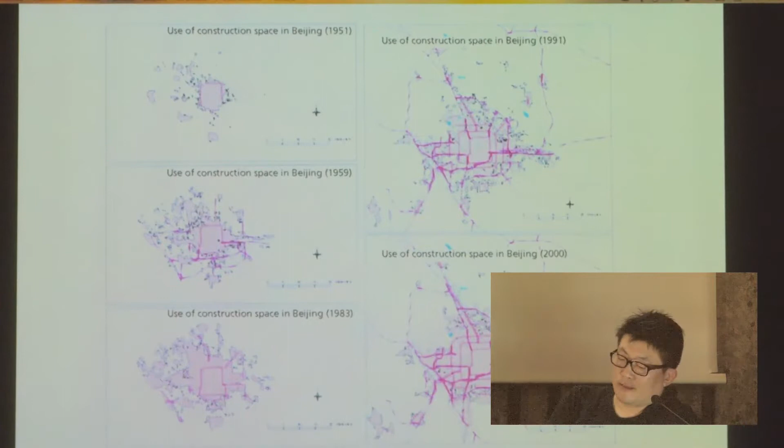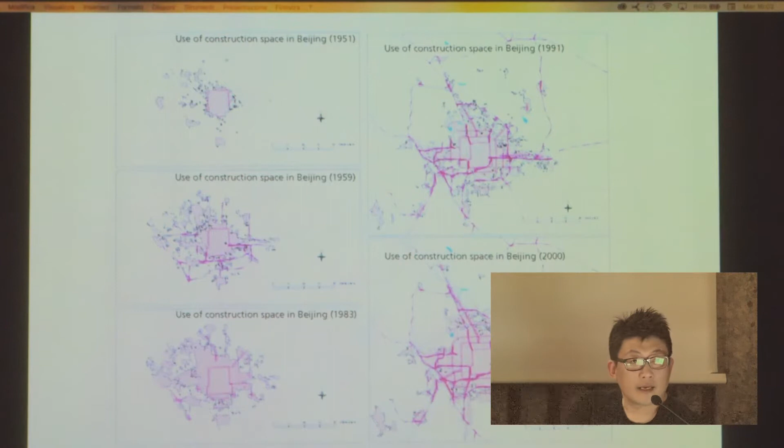So I'm a Beijing person. I was born in Beijing. This diagram shows you the expansion of Beijing. This is the city back in 1951. And this is the same scale. And by 2000, the city had already become this size. It's the same scale. So you can imagine how fast the city has been expanding. But this picture is even more interesting. This is the old map right after the liberation of China. So this is the capital of Beijing, the yellow part.

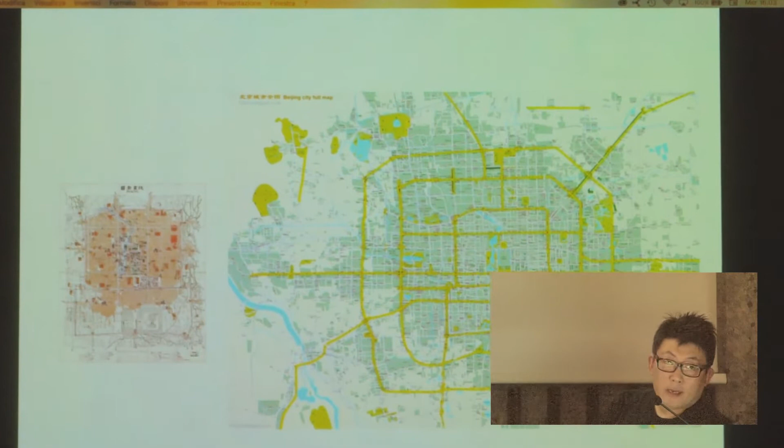And this is today's Beijing. And these are in the same scale. So, in the old Beijing, we have the famous city wall. It's this boundary here. But now the city wall has vanished because we demolished it. And we actually changed the city wall to what we call the second ring of Beijing, which is a very important expressway. But now we already have the 6th ring, and we're building the 7th ring. So just to give you a sense.

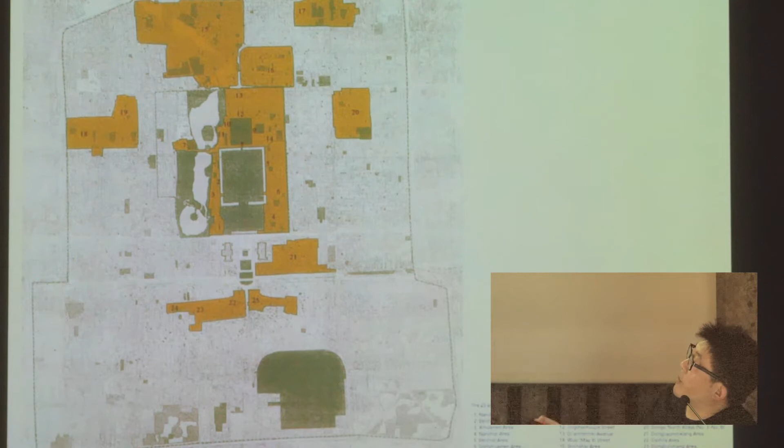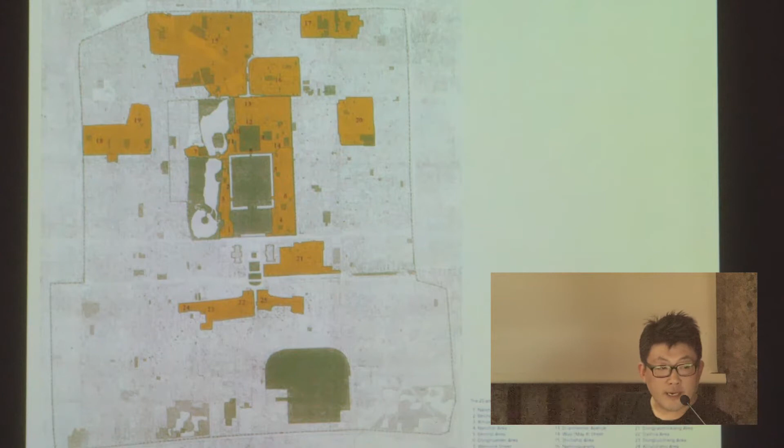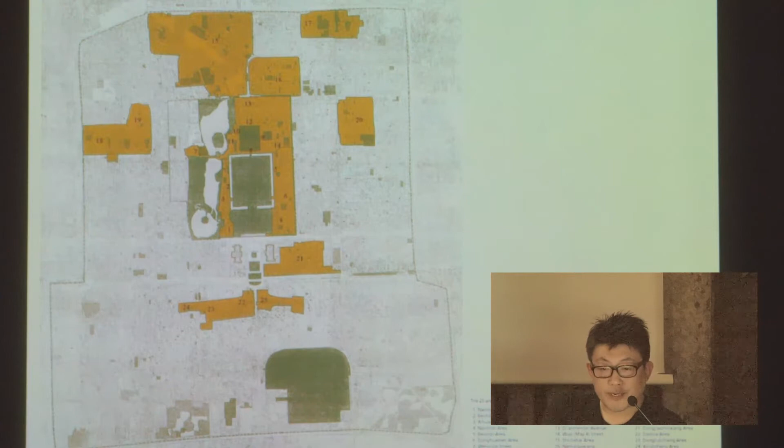And this diagram shows that this is the boundary of the city wall. Before, in the old time, inside the city wall was the continuous, complete urban texture made by temples, by the Forbidden City, and by the courtyard texture. It's a continuous, beautiful urban fabric. But now, only 25 pieces are preserved. All the rest of the area has already been modernized by this totally different characteristic of architecture and urban situation. So that's the picture I give you.

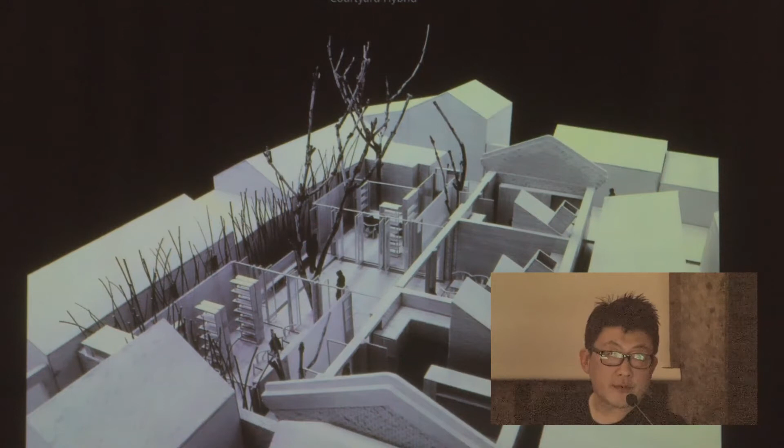I think in the recent 5 years, or even a little shorter time, for example, 3 years maybe, more and more people started realizing we have encountered a very serious issue. We sort of lose the character and the essence of the city we grew up in and are familiar with. So during such a transitional time, I think it's a great challenge for architects because we always have to make our own judgment based on each different project. We have to think enough about whether this is the right thing we do or not.

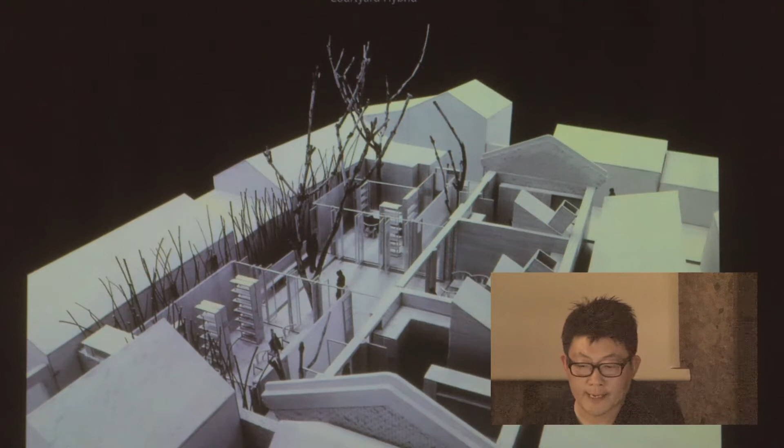So China is such a huge country. My personal feeling as an architect is that even though we are Chinese architects and we practice in China, if you go to a different city to design different architecture at different places, sometimes you face totally different culture, different climate, different people, different lifestyle. But that's part of the interesting thing of architecture, because you always have a specific condition unique enough to challenge you or to develop your own concept, engaging with the surrounding condition.

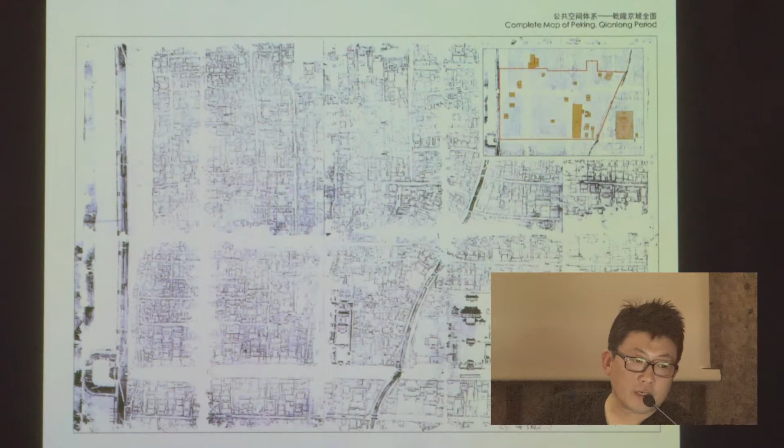And for me, that's almost like the dream place to live, because you have your rooms surrounding exterior space, so you have your own piece of sky, and you have your own piece of earth. And normally you will have trees and vegetation inside the courtyard. So it's really about artificial and nature. I think that's a very harmonious relationship between humankind and nature.

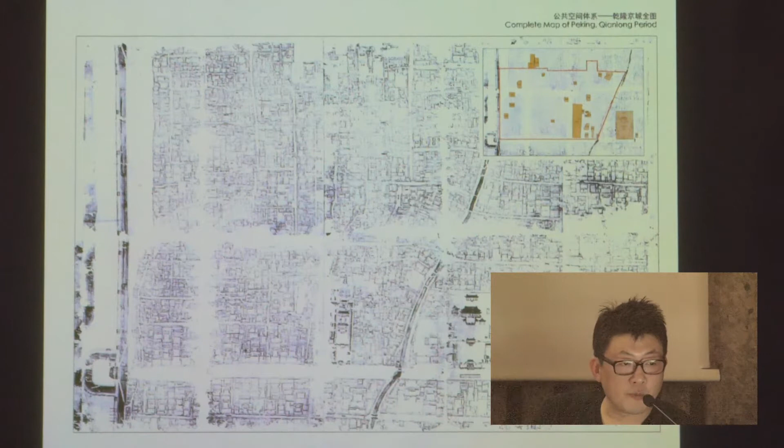But as I explained, right after the liberation, many people came into the city and the population started growing drastically. The light gray is a little bit unclear. Basically, the light gray is the original texture of the city, but these black blocks are actually the additional spaces inside the courtyard. We call this the cluster courtyard, because before, one courtyard was only for one family. So it was a perfect relationship between publicity and privacy.

But now we don't have that condition anymore, because most of the courtyards in this district have to be shared by 5 or 6 families. So it changed the living condition in a very bad way, actually. So this is a diagram showing the original texture of the courtyard district.

And you see the density has changed over the recent 20 or 30 years, with this additional space built inside the yards. It's actually the local residents who built such spaces by themselves, without any permission, because this is their daily living space. They don't need permission to build this kind of stuff.

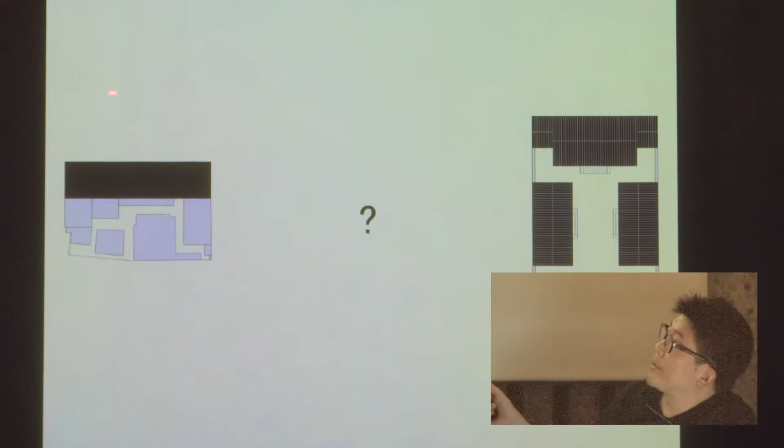So our design task: this is the original courtyard, but this is the cluster courtyard. We have to face this condition. The courtyard we're working with actually belongs to the government. It's a dormitory shared by 5 families.

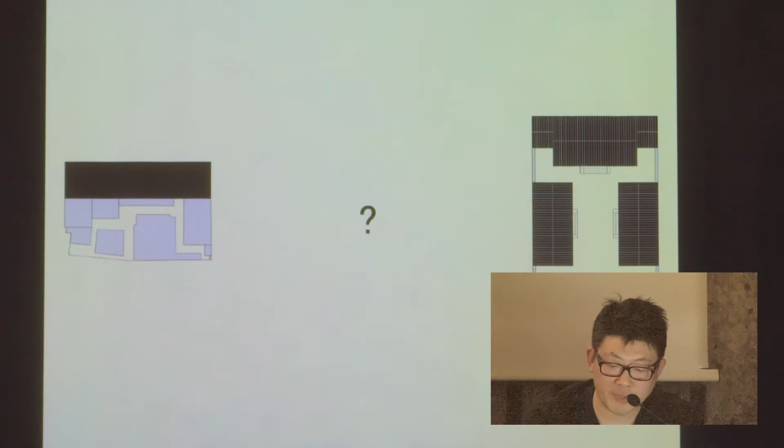The government was able to give them other places to live around this neighborhood, and they want to empty this courtyard and transform it into public space to energize the local neighborhood and create some public social life. So that's the design program.

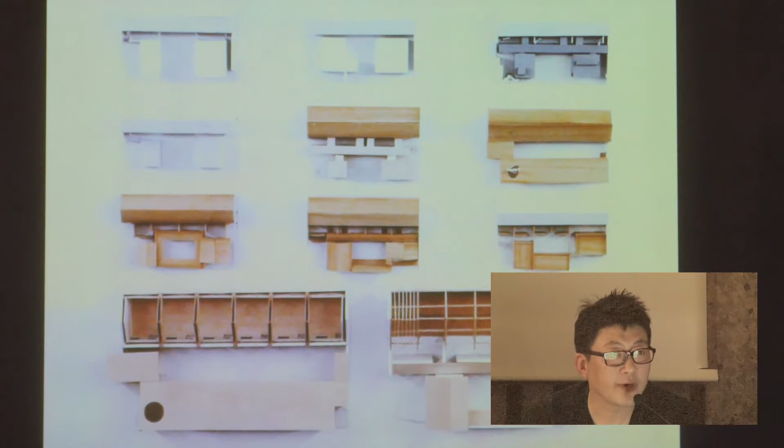In the very beginning, we went through a series of design comparisons, trying to find the appropriate design solution through all these sketches and models. And this is very close to the eventual layout. It's a very small courtyard, only 200 square meters including the yard and the interior space. But inside the courtyard there's a series of functions. That's why we call this a courtyard hybrid. It's a mix of functions.

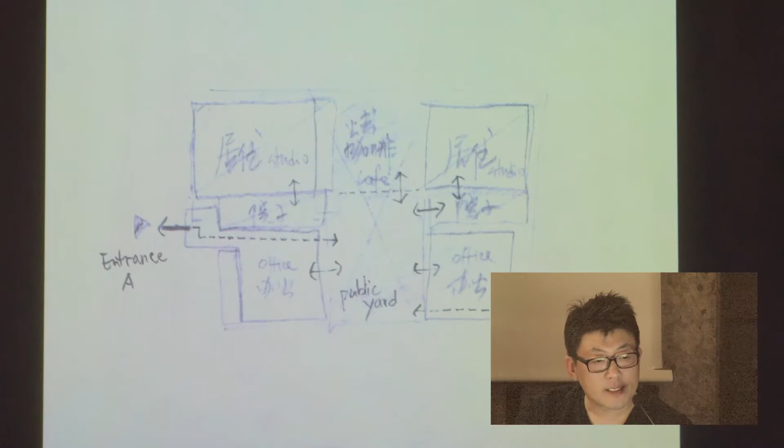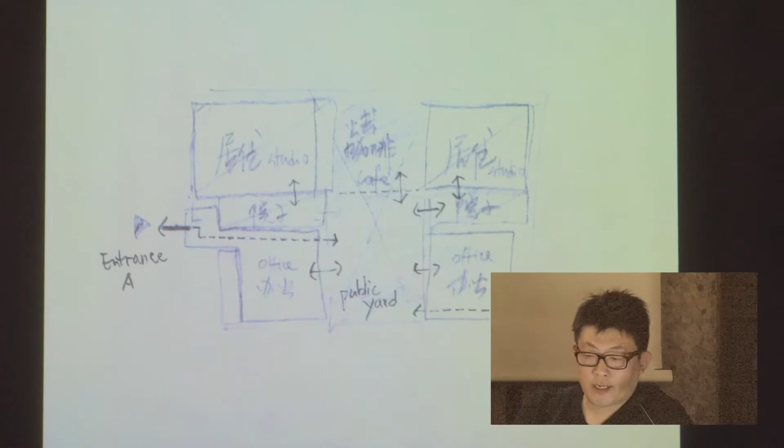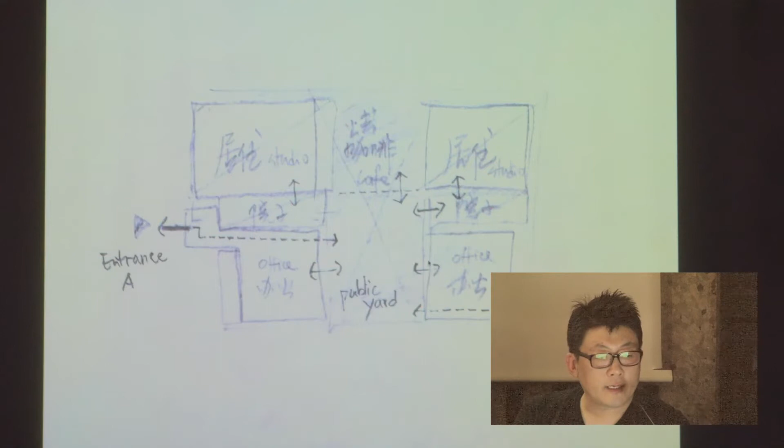We have to leave these two corners for future rental space, for workers and professionals working around the neighborhood. So it's the leasing space. But because we're trying to create public space for the neighborhood, we leave the central room for a public coffee and lunch. And this part is still exterior space as a central yard.

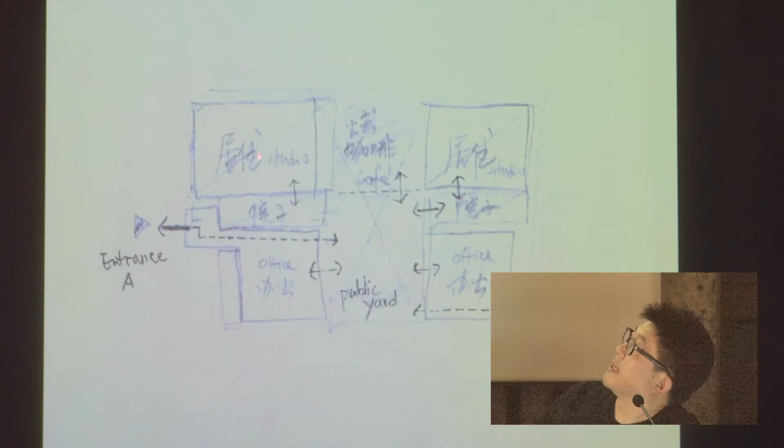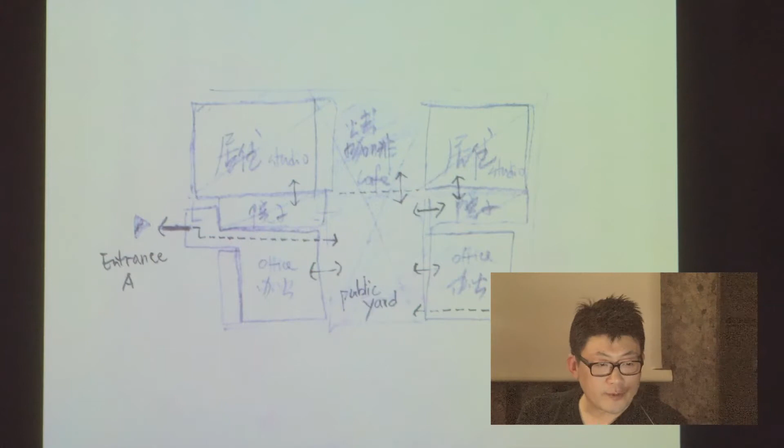To set up this privacy, we leave these two very small yards to separate the private space and the public space. And these two small rooms are multi-function rooms, which will be used for different purposes after construction. So that's basically the structure of the space. And this is a more detailed diagram.

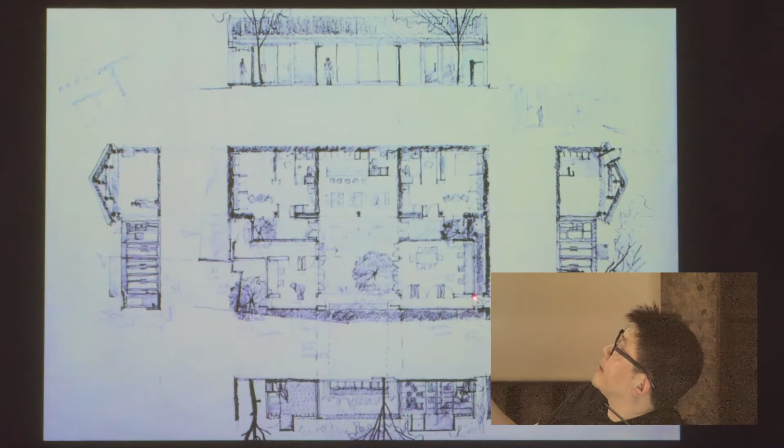You can see we have two small units for living, for rental, then two small multi-function rooms and the central cafe, and they share one big yard, with the two small private yards on the sides. But what's very interesting about this location is we have a Hutong, which is a very narrow public alley, on this side and on this side too. So we leave a passage between these two Hutongs, meaning this yard can connect the urban circulation of the public.

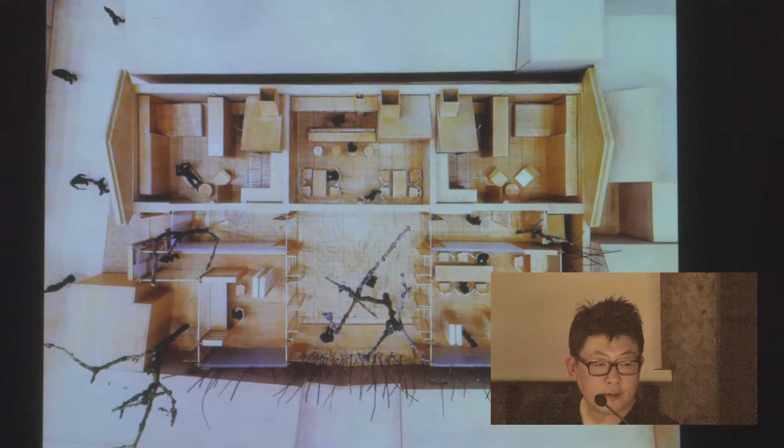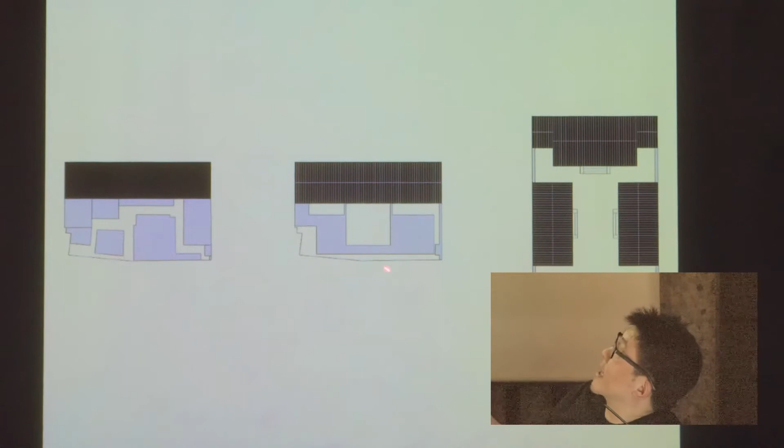Gradually we went into this larger scale model study for the space. Basically, between the traditional courtyard and the cluster courtyard, that's our layout. This is an axonometric showing you the space underneath and the structure system, which is basically two kinds of structure, because we have to rebuild this part complying with the local code, because that's the main building along this urban fabric. But for these two parts, we can use a relatively more contemporary structure type, which I will explain later.

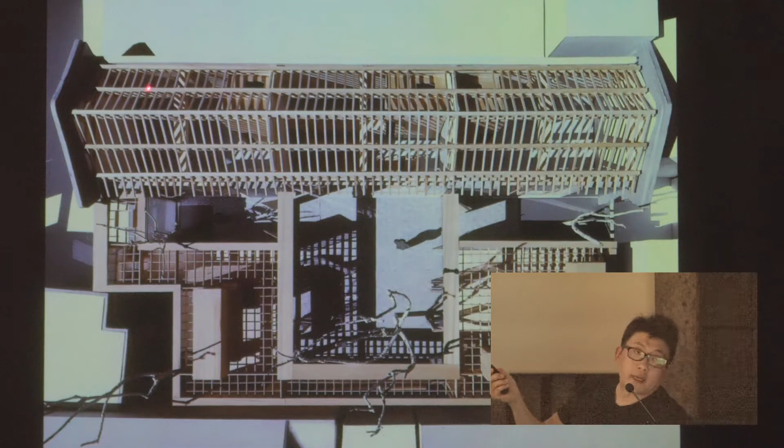So you can see that's the model showing you the two systems of the structure. This is the traditional gable roof timber structure system. And this is by a laminated bamboo, and it's like a waffle beam structure system. So it's like a juxtaposition of the two systems, representing the old and the new.

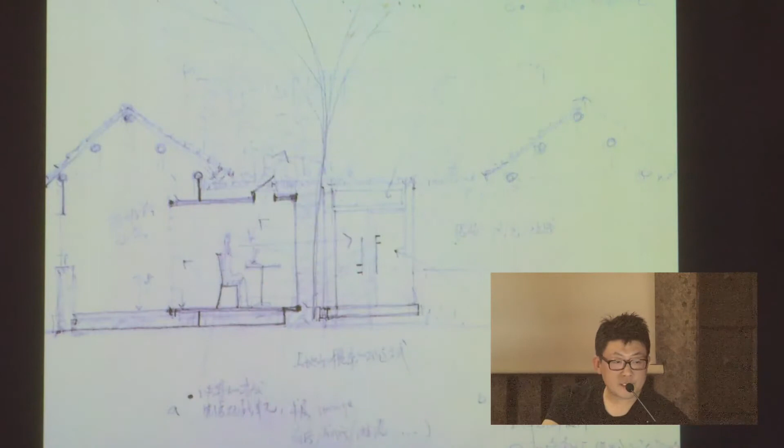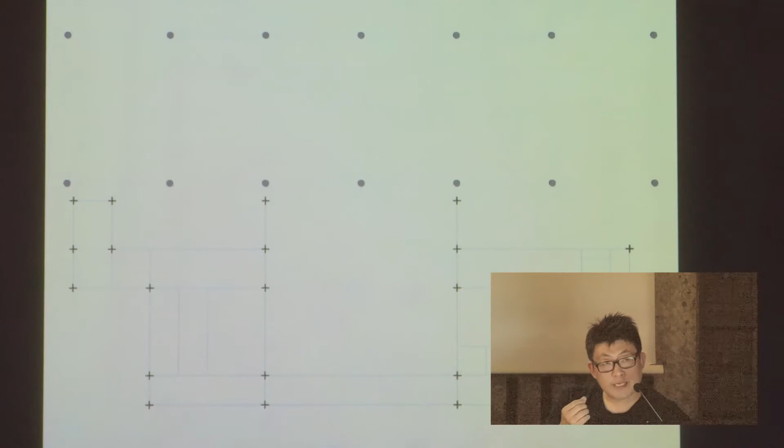Some sketches during the design process. So that's the two major structure systems. This is traditional, and that's actually designed by us, the architects. The reason we use this new system is because we have to try to build this building within a very limited time frame, and also we have to reduce disturbing the neighborhood.

So the new structure system, which is the laminated bamboo structure system, we can prefabricate it in the factory and then ship on site and assemble on site. So that will give us a lot of convenience to build this up. And the laminated bamboo is all plate. We use this copper bracket just to hold them together to be column and beams.

Well, it's a sad story. During the construction drawing process, one day the client called me and said, "Dong, we changed our mind. We want to eliminate the two living units in both corners because we think it's very hard to operate later on." Because they're the government people, they don't have the professional resources to help them

manage those. So they said, why not we just leave this space empty as a public exhibition space, and we can collaborate with Beijing Design Week or something like that to have different kinds of public events take place here. Well, it's a sacrifice, but I think it's okay. So that's a big change.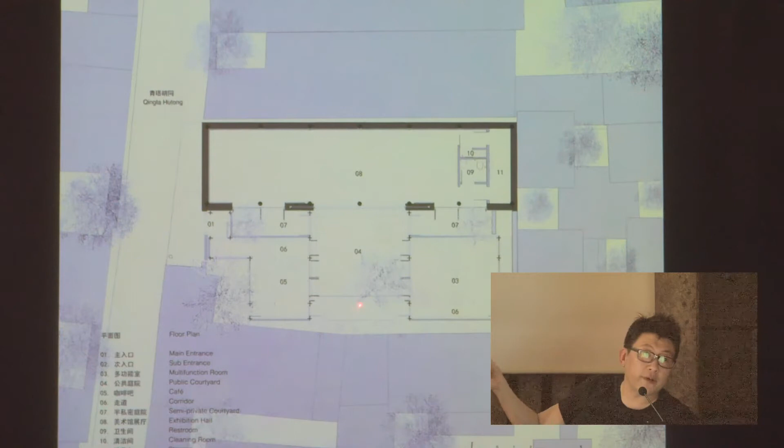From the quality of the space, I think it loses a kind of relationship between the small yards and the living units behind. But we just have to accept. But that's not the end of the story, which I will explain to you later on. So after almost 8 or 9 months of construction, this whole building is completed.

So this is the traditional gable roof structure, the tile roof. That's the old part of the courtyard. And that's our new intervention by this laminated bamboo structure system. And this is the center space of the entire courtyard. Just show you some pictures after the completion.

Because the space is very small, we think this entire building is a big furniture. Many components of the building are operable. They could be open or rotate to meet the different requirements of the use by the people. So this is some elements and the condition of the courtyard. See, the shelf is rotatable to manipulate the layout of the space. This is a small pantry. It's also a rotatable furniture.

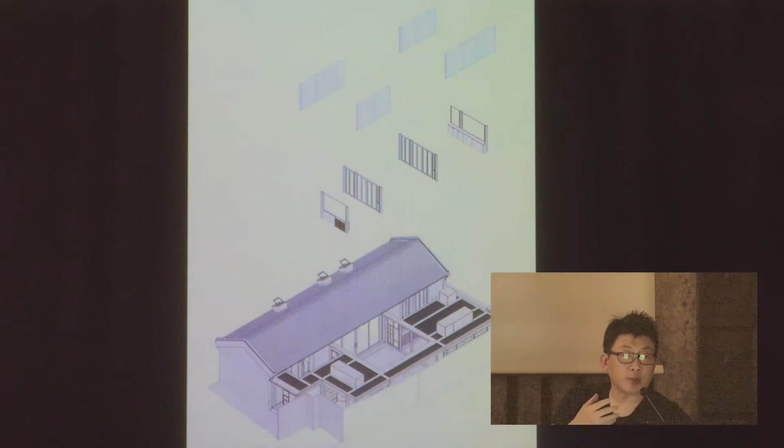And to create a kind of privacy, we actually use the material of glass block, which is a translucent material, to separate some individual space and public space. So this component here is made by this glass block system. It's customized, actually. We work with a local, very small factory to customize this material. And this is the twilight condition.

So in one of the directions, the space is very transparent. You see layers of space evolving in front of you. But in a particular direction, the glass block is translucent to create a certain privacy of the space. Yeah, that's basically the overall urban texture with our design in the middle.

So after the completion of the yard, the client called me again and said, we are very sorry, Dong, because we rent this entire yard out. So it's no longer a public space. We signed a 5-year lease with a private agency, which is a children's educational agency. So in the very beginning, this whole space was supposed to be designed as a public space for the neighborhood. But as a result, it's becoming a private, very expensive rental space.

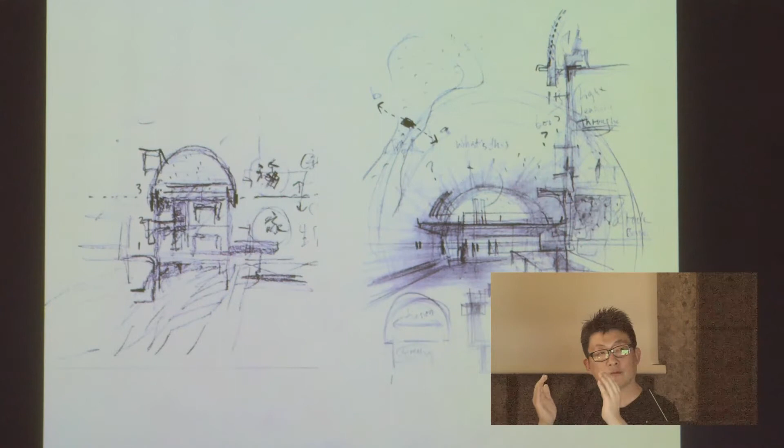also, this barrel vault itself is a type of structure. So it will come up with this load-bearing wall below and then converge naturally on the top. So you don't need to add columns and beams to support this. This is already a structure.

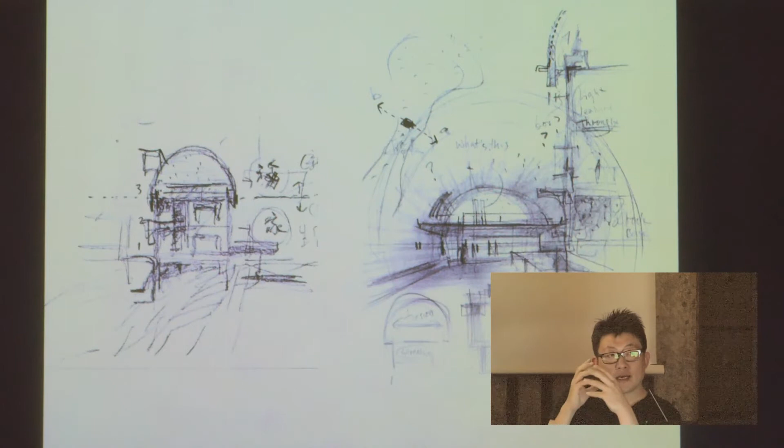And additionally, this entire family is religious people. They believe in Christianity. So this shape or this type of space has a very subtle indication of the church. So for them, in my mind, it could be like a family chapel. So there's a series of reasons why we selected this type of space.

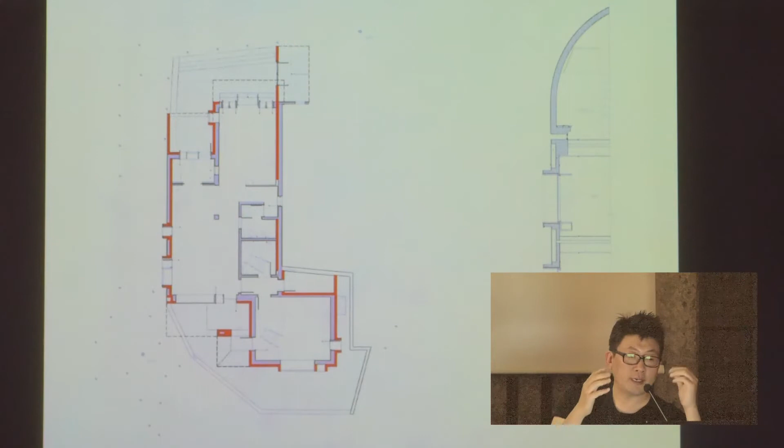And the solution of the structure: because of the current structure problem, and also we have to add the new floor on the top, the structure is a very critical issue in this design process. Eventually, we worked with the structural engineer and made the decision that the red lines are the new layer of 12 centimeter concrete attached to the original masonry brick wall to reinforce the existing structure system and also to support the floor at the top, which is over here.

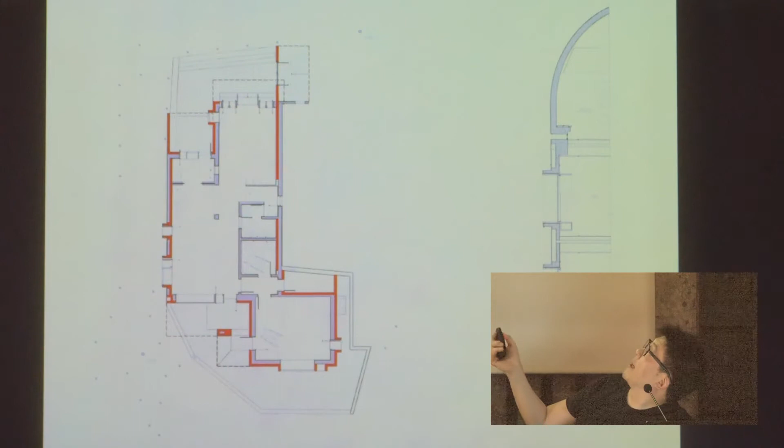And we actually leave a very narrow gap between this existing two-story structure and the new floor, which is the third floor, to indicate a relationship of new and old. That's basically the structure solution. But because of the new intervention of the structure, we have a little freedom to relocate some of the existing rooms.

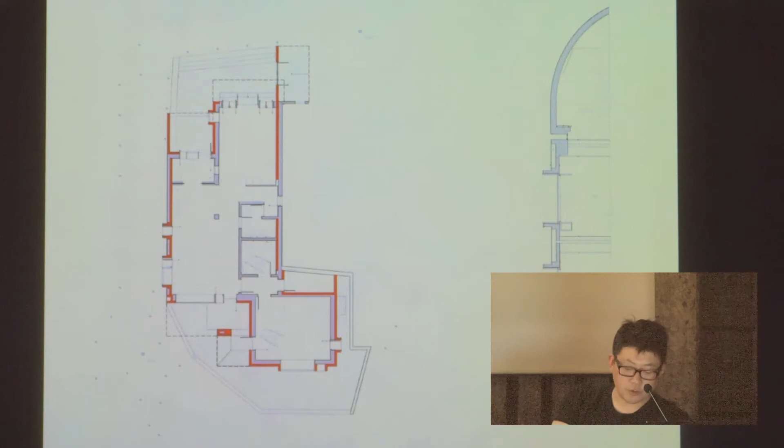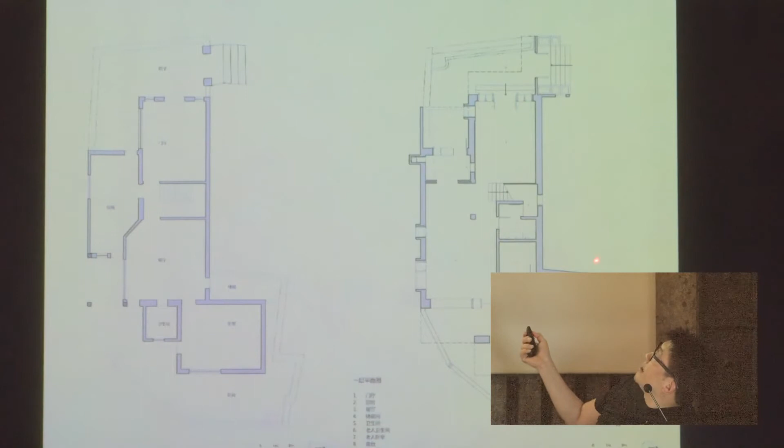See, this is their original floor plan of the first floor. That's the ocean direction. And they have the toilet right in the middle to block the view and the air and the light. So in the new design, because of the new structure, we can relocate this supplementary program to the back wall of the house, shared with the neighbors. That's the footprint of the neighbor's house. So we open up the major direction to the ocean to introduce more light, air, and also the view.

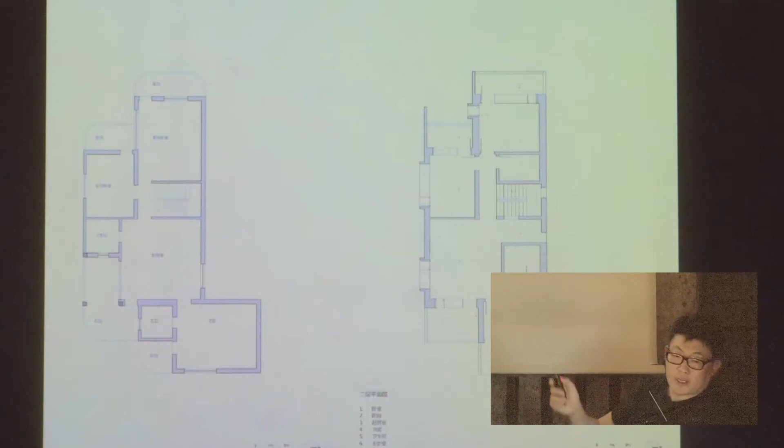A little bit similar on the second floor. Before, there were 2 bathrooms, and we relocated the bathroom along this wall to open up the major facade to nature. And the third floor for them is basically multifunctional. Right now they're doing karaoke in this space, and also they have a running machine here. So it's a family gym.

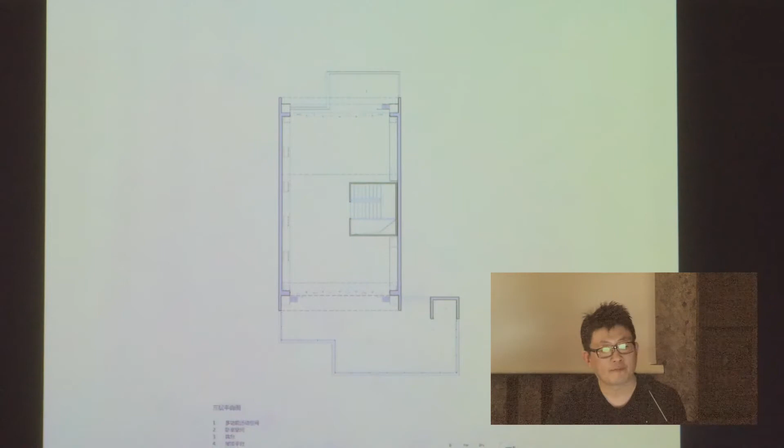They're not poor people, by the way, because of the captain and also the fishing industry, very good profit. So they're sort of rich people, but they're still villagers.

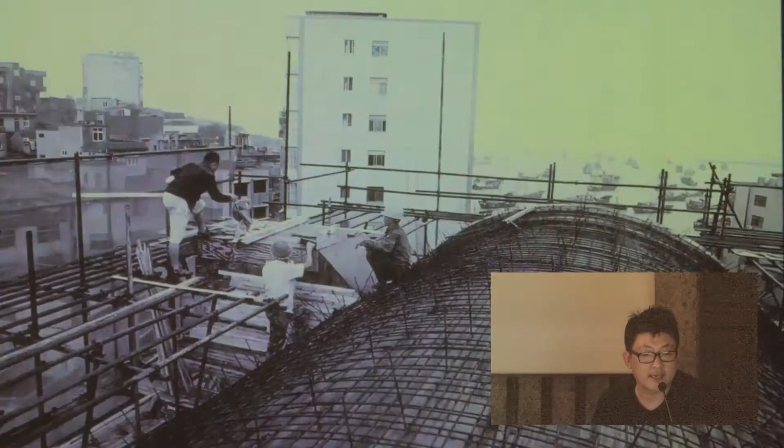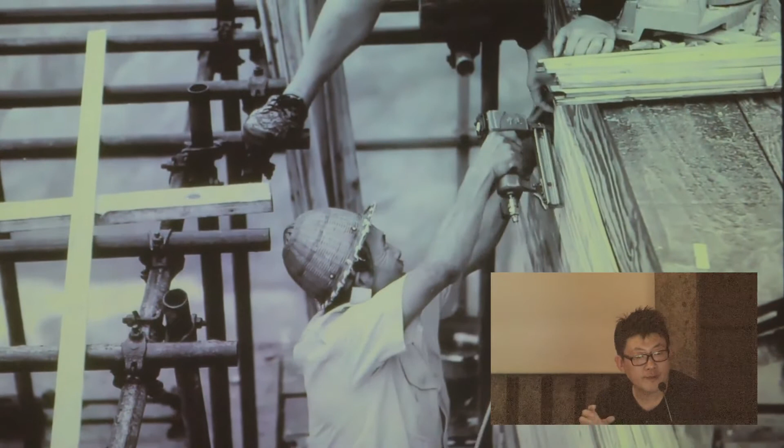Yeah. This is also another challenge to be an architect practicing in China, because sometimes you will encounter this very primitive construction technique. This building, first of all, is in the village, and because of the very narrow alley around the house, no big machine can approach the site. So everything is literally by hand. It's a handmade architecture.

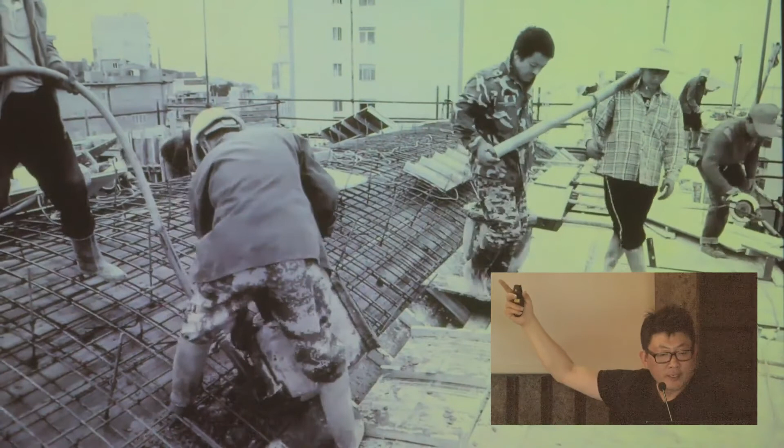And you can see this is the truck that transports the cement, and they have to stop about 50 meters away from the building. Then the concrete is carried by human shoulder to the house to cast the concrete on site. They're female workers. And they use the gear, and it's just barrel by barrel. The cement is carried up to the roof and then cast by hand.

In Beijing or Shanghai, in these big cities, the construction technology is already very developed. But in some remote areas, we still have to work with these very primitive conditions, which I think is very interesting. It's not a bad thing. It's a very unique thing.

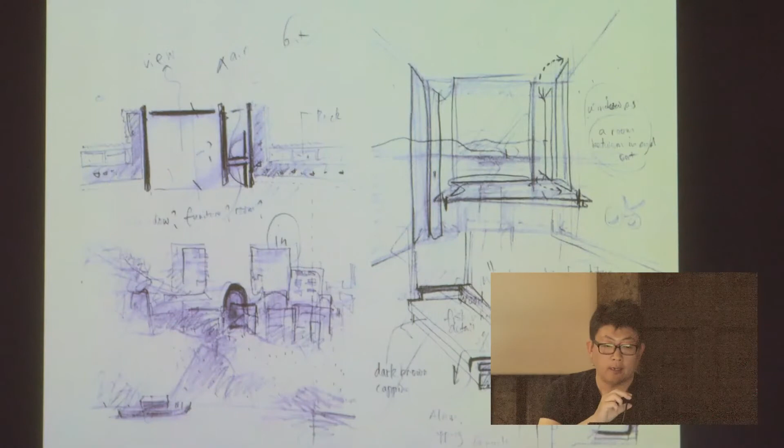There's another very important detail in this design project, which is the way we treat the window. Because we add a layer of structure attached to the original wall, we have a certain thickness, a depth of the wall, so we can play with it. We interpret each window not only as a cut opening in the middle of the wall, but as an insertion of a small space. So some windows are a table, some are a couch, for example, or some are a desk.

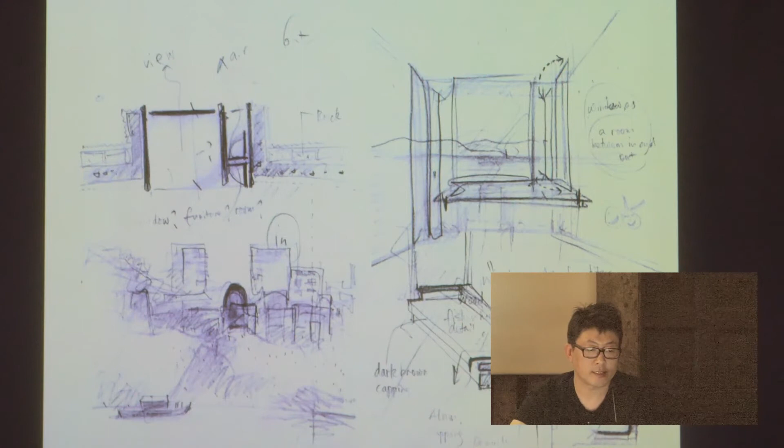So these are some sketches in the design process showing you the iconic details. For example, that's the living room, so the window becomes a couch. And we have this operable pane inside the window system. Each operable pane is always opaque, made of wood panel. We try to pull this operable pane into the space so it's convenient for your arm to control.

But we push the transparent glass pane to the very outside of the window system to maximize your view to nature. So that's the detailed design for the window system. That's when the operable pane is open. And that's the table for the daughter's bedroom. It's actually an insertion into the wall.

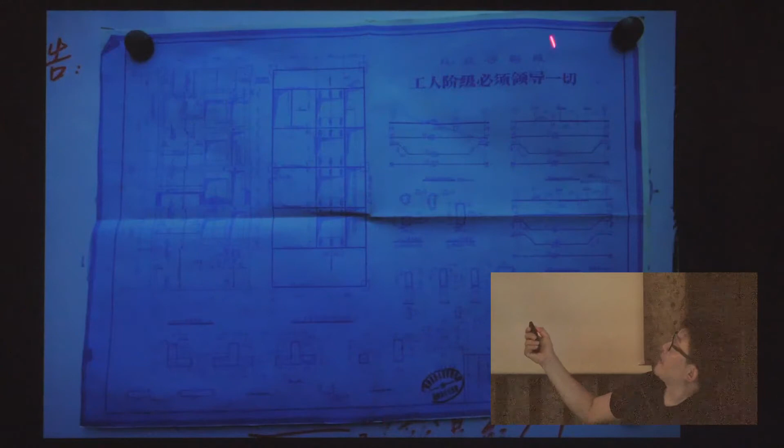That's a very interesting ideological period of time in China. And that's another construction drawing that said, we have to follow the great leader Chairman Mao to go forward. But that's the technical drawing.

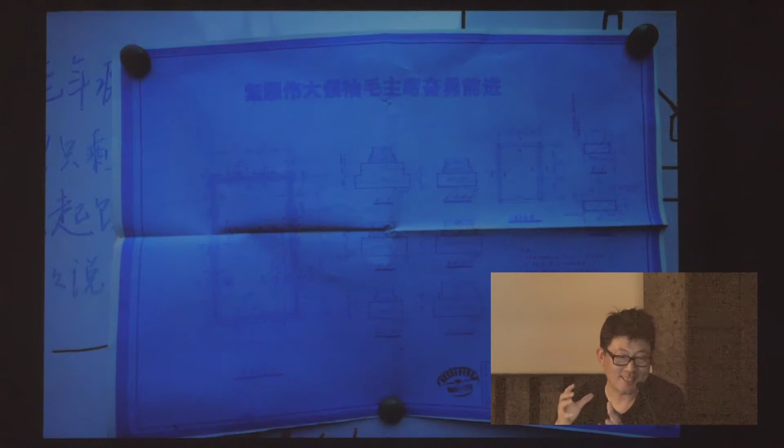And I had this chance to have a lunch together with some of the people who worked in this factory in their younger time. And I feel the emotion when we talk about the stories of their work there. And one of these guys even cried when he remembered his younger time. Because 30 years ago in China, if your family had a member able to work in this kind of governmental institution, it was an honor.

But you can imagine in the recent 20 or 30 years, China has transformed into a more commercial system. So they feel lost to a certain extent. But for me, this is a very important lunch because I feel this connection and the emotional attachment between these local people and that physical abandoned structure. So it's a very interesting connection actually for us to start the design process.

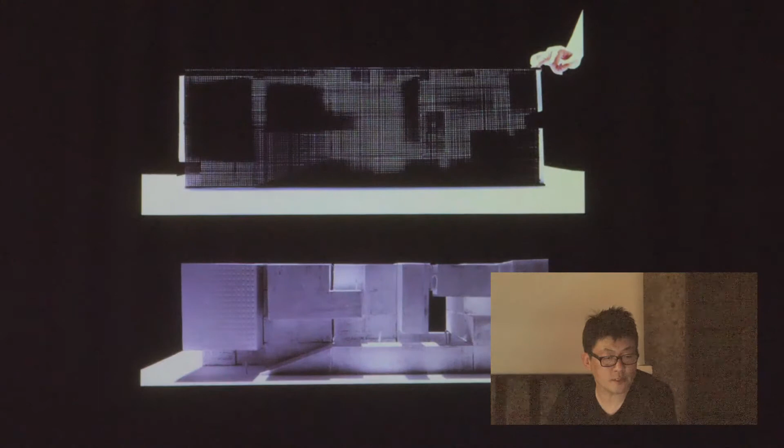Some design study in progress models. And gradually some ideas about the space started coming up. So we actually try to build a continuous pathway inside the new volume to give people the possibility to perceive the surrounding landscape at different heights. So the path is like a climbing-up pathway inside the new volume of the architecture. Some sketches during the process, some model study.

And along the passage, we set up 3 public terraces, somehow inspired by the local geographical features, this cave-like space. Because of the characteristic of the mountain, the rock is very soft. We call this a karst mountain. It's a term of geography. And when people try to cross the mountain from one side to another, normally they carve out this very narrow passage inside the mountain. So this gives us some inspiration when we design the new system of the pathway along the new building.

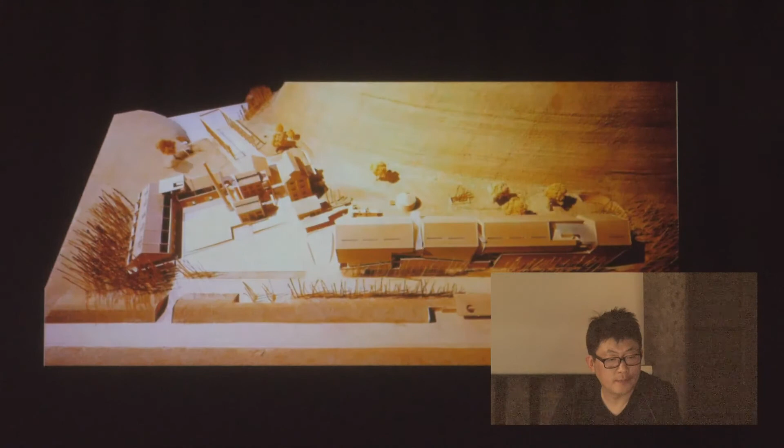And the good thing about this carving out is that we can still keep the form as simple as possible, because everything is inside. Meaning that the simple geometry will work better together with the old structure of the factory. So that's basically a diagram showing a continuous pathway connecting 3 terraces along the way. That's a more detailed schematic model.

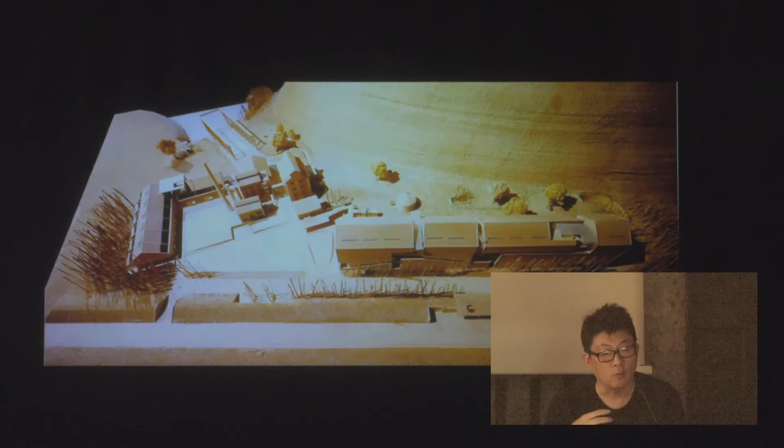So basically, the old structure is here, and that's the Lijiang River. This is a central reflecting pond. This is the new volume of the typical rooms, and that's the villa part. So that's the whole site plan of the context. And this is the main entrance, the gate of the hotel. So the new volume is actually acting like a wall to block this garden from the outside driveway.

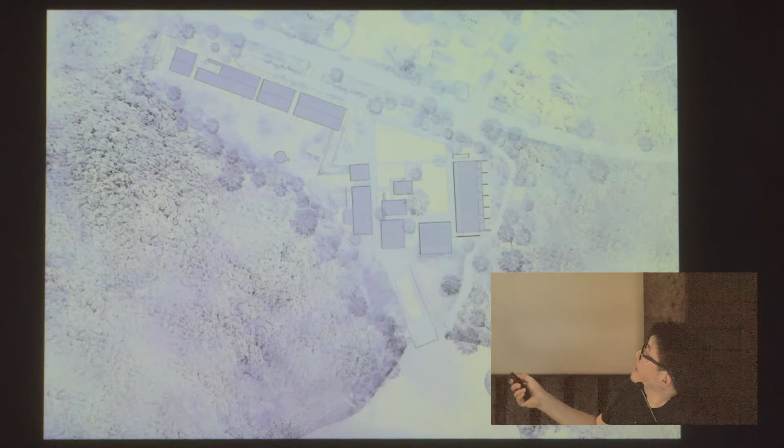That's another angle of the model. The master plan. So that's the new volume on this side, and this is the villa part. This is the new volume too. And that's the cluster of the old factory. That's the Lijiang River. And this is the truss from the old time to carry sugar cane from the river transportation, the boats, to the factory. So this is the original truss, but we transformed this place into a swimming pool. And the old factory right now is the restaurant, library, coffee, bars, this kind of supplementary program for the hotel.

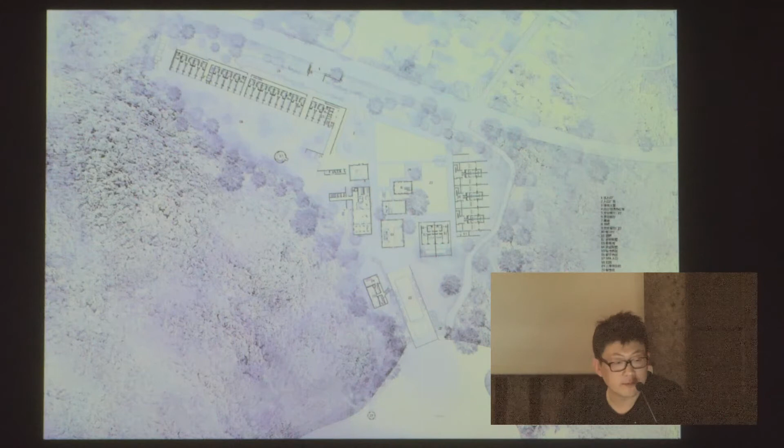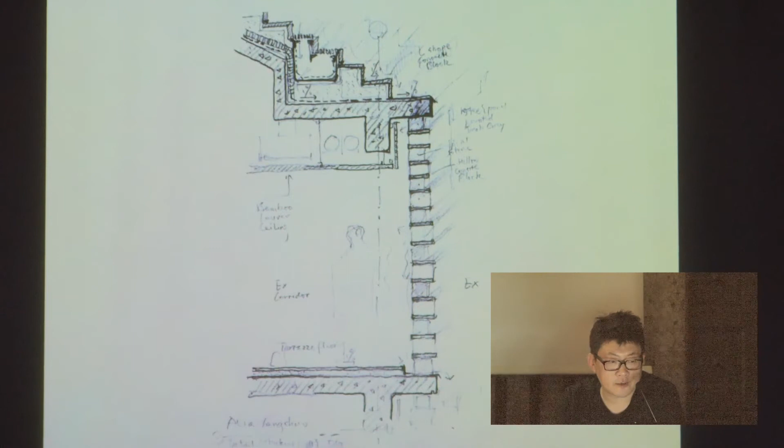And then later on, we went into the manufacture process, and the client worked with us very closely, trying to find the right manufacturer of the material. We have been searching for almost half a year around the nation, but eventually we gave up because the price is too high because of this kind of customization. And the solution was the client opened up their own factory alongside the site. It's a very small factory, so everything is possible in China.

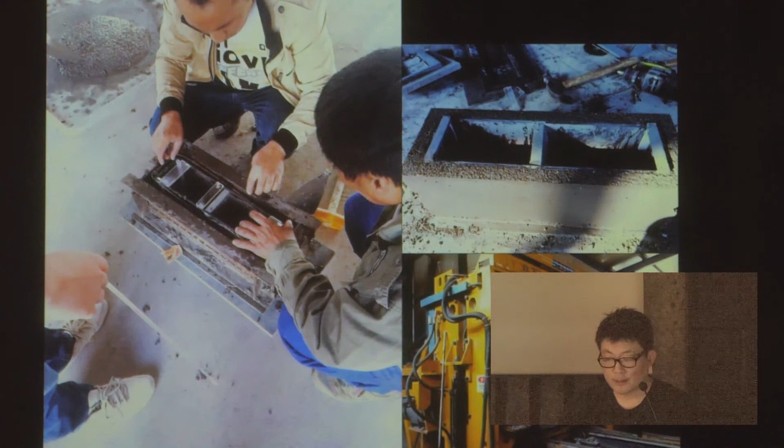So that's actually in the client's factory. It's a small workshop. We do some research about the different percentage of the aggregates, and also they invented this machine because basically they have to build the mold first, then they cast the cement inside the mold, and then they have to push the block out. And that's actually very tricky because of the shape, the geometry of the block. So they invented this very rough machine. I have some pictures later. I'll show you some detail.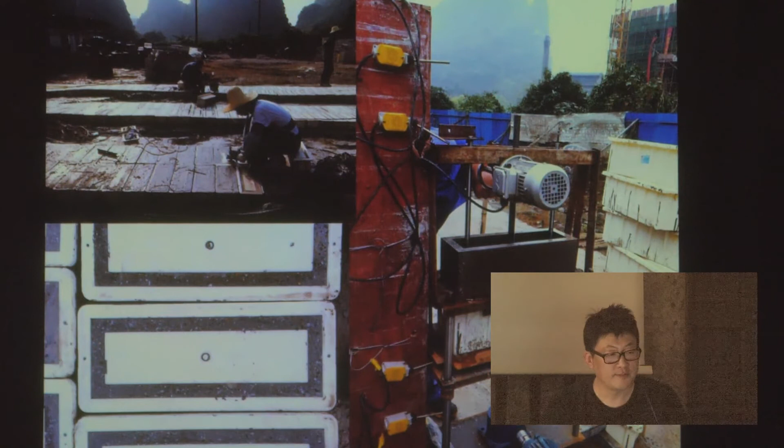And that's the mold, the plastic mold here. And they start putting the cement inside the mold. And this is when they put the steel rod to give sort of a tension for the concrete block. And here is a half circle wood stick. I will explain what the function of that is. And that's the machine to pull out this concrete block when it dries up. See, that's the wood stick.

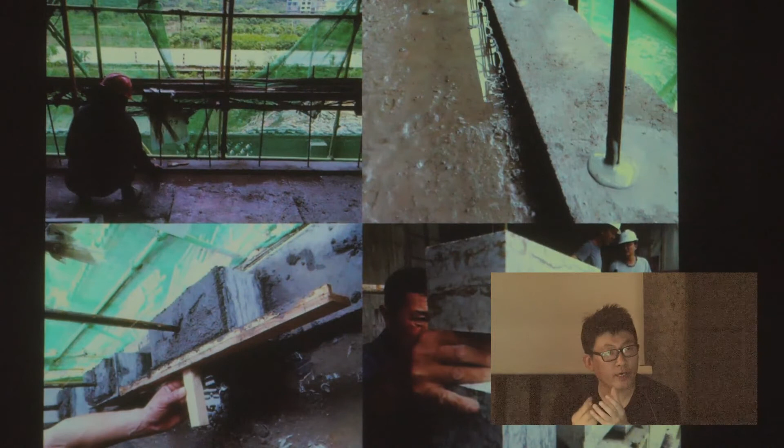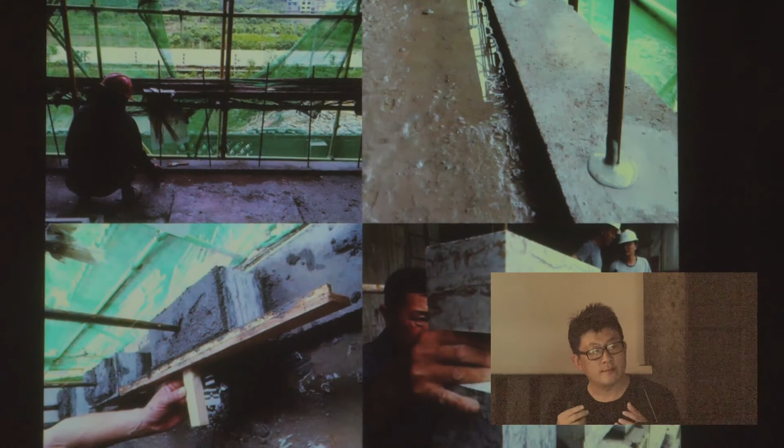And then there's the process of stacking. To resist the lateral force, but we don't want to have exposed reinforced concrete columns along the wall, so we have to put the rebars inside the wall. But we don't want to expose the rebars. So the rebars basically will go through the wall piece by piece. So actually every piece of block will have rebars to reinforce them to resist the lateral force of the entire wall.

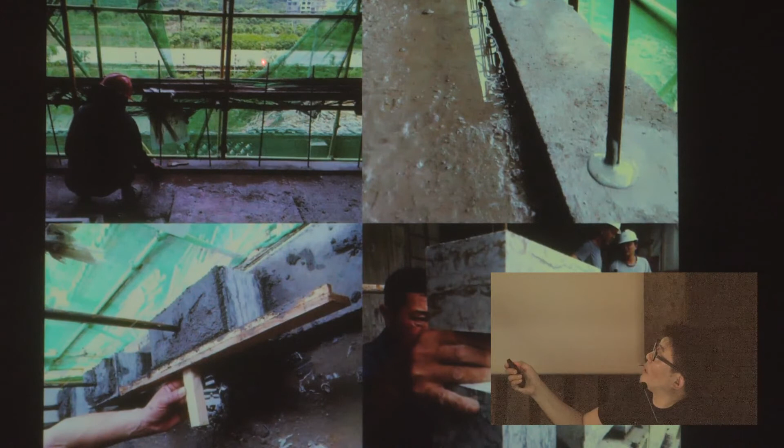Because of the stacking process, they have to stack one piece of concrete block, another piece of stone block. So basically it's by human hand. So when they weld the rebar, technically the rebar has to be connected to the floor above as an entire piece. But because of the stacking process, they do it piece by piece. So they weld the rebar first, and then start stacking the blocks. And then they weld another piece of rebar on top of it. Eventually, the rebar will connect to the top floor. So basically, the rebar is connected to the top and the bottom floor slab, to the main structure, to help resist the lateral load.

See, for the stone block, basically we drill a hole in the middle to allow the rebar to go through. But for the concrete block, this is a half circle. Remember that wood stick. Because of the wood stick, on each side of the block we'll have this half circle empty space. So together with another piece of block, the circle will allow the rebar to go through. So eventually the rebar is hidden inside the wall.

But the problem is how we finish the very top piece, because the rebar will go all the way up and has to be connected to the floor slab above. So the very top piece is a very tricky issue. And we actually spent a week; we didn't really think about this before the construction had the problem. And then we had to work together with the laborers to find the solution. And later on, it's the laborers who solved the issue. First of all, they leave an empty space between the rebar and the top slab. They put an additional piece of rock like this.

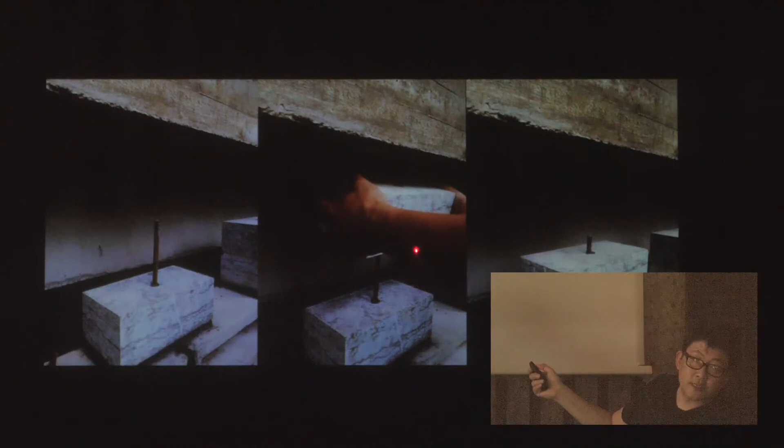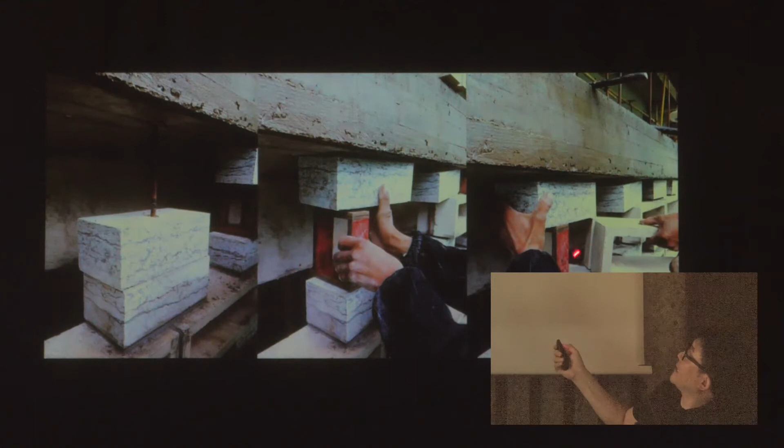And then they weld the rebar to the top of the slab. And they push up this piece of stone and slide the concrete block. So they eventually finish this entire piece of this facade. So it will be like this eventually. So it's kind of tricky. I will show you a movie about the construction process.

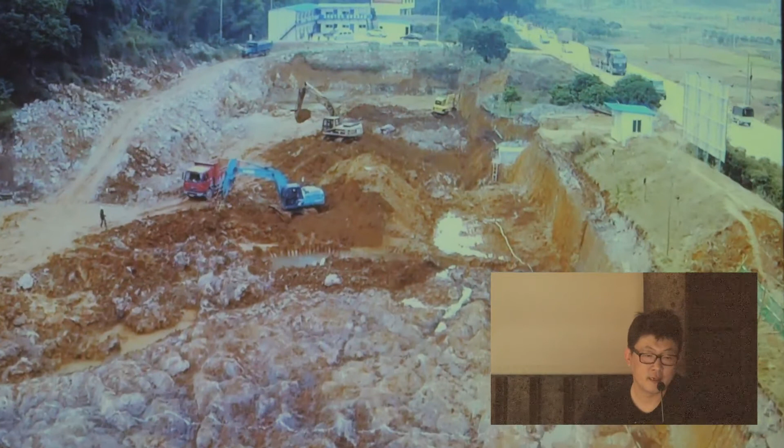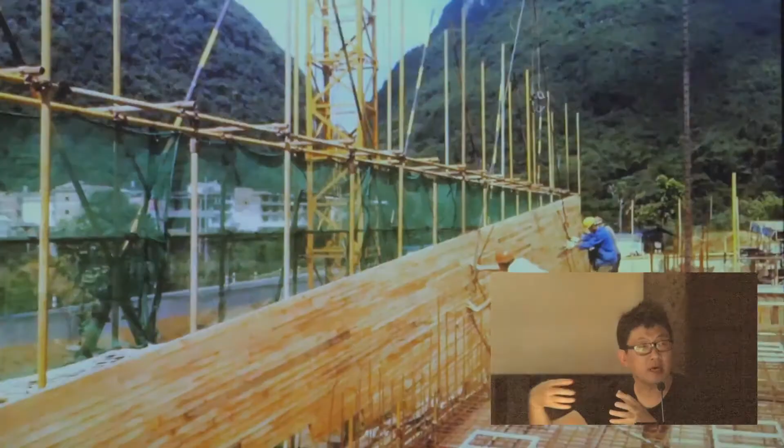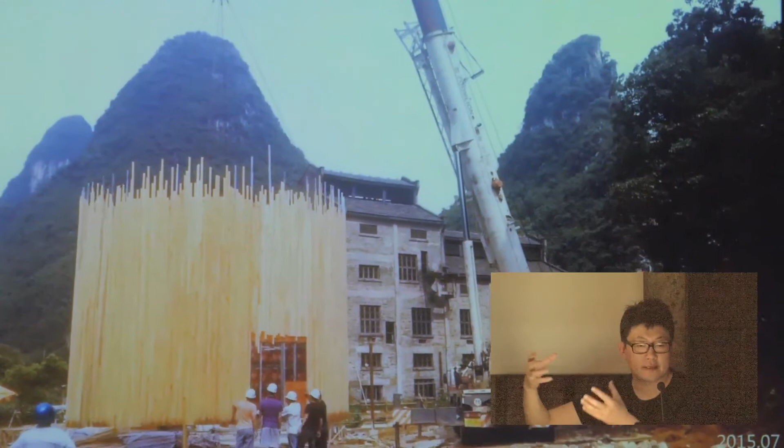And casting the concrete for the slab and the beams. We're trying to reduce the construction joints on the surface of the concrete. So we try to maximize the formwork. This is the big formwork installed to the right projection of the building. So sometimes it's the whole piece of one space. And that's the formwork. That's how they push out the concrete block.

That's where we test the strength of the block. We do have a structural engineer, but we're trying to make sure. That's the topping of the structural system. And that's the site. That's the landscape. That's the stacking process.

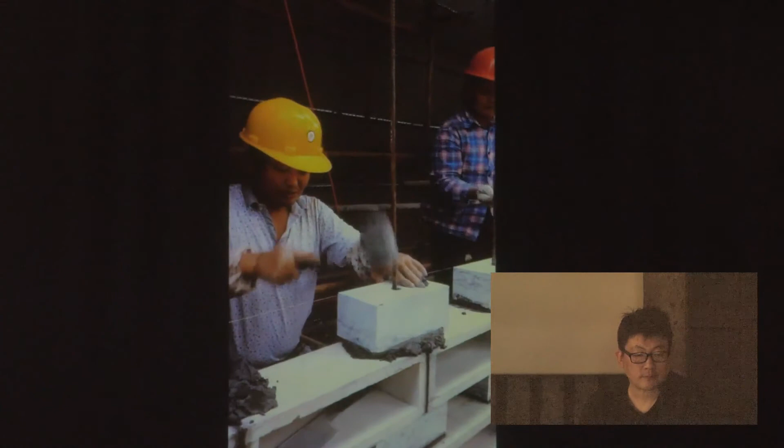That's myself and the interior designer. And we have a fence around the compound. So this is basically from the local stone wall technique. On the other side of the fence is a slope of grass. That's the waterproofing of the basement. This is when they made some mistake, they had to knock it off.

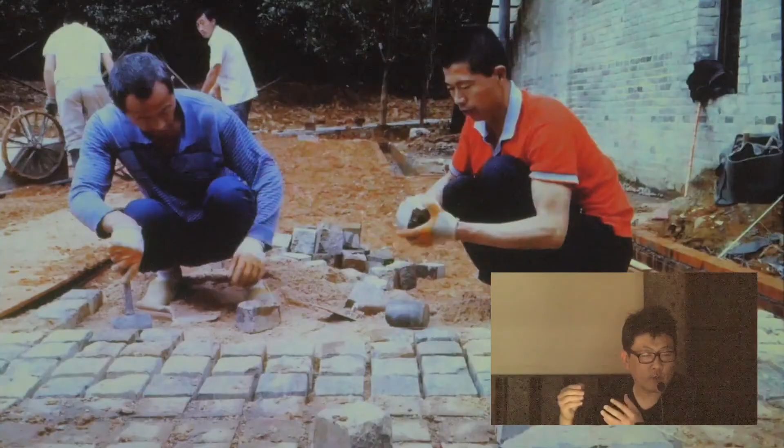We have bamboo installation because there's a lot of bamboo in the local area. This is when they install the bamboo sticks. That's the interior designer and myself. We designed the location of trees on the construction site. We don't have a landscape designer in this project. Basically between the two of us. And in the middle of the reflecting pond, we have a cut-in walkway. Later on, you will see it.

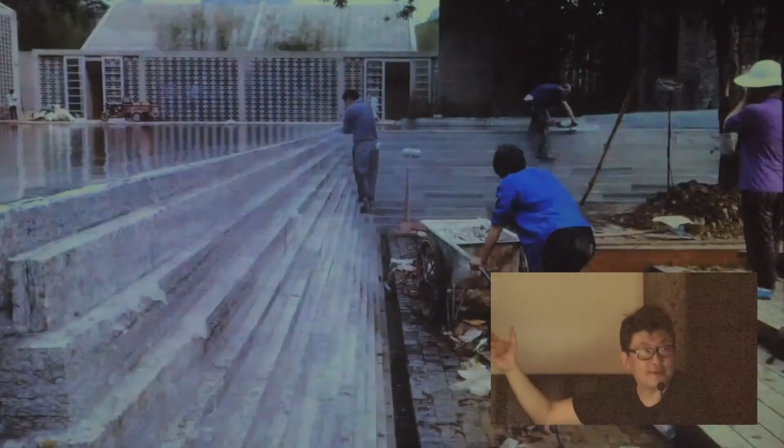That's our site architect. He stayed here for 3 years. And his wife is in Beijing. So it's a very big sacrifice. That's when they plant the bamboos close to the finish of the entire project. This is July 1st of 2017, which is about 2 years ago. The ceremony of local tradition of these firecrackers.

And the very next day, July 2nd of the same year, we encountered the largest flood of the local area in the recent 50 years. So the Lijiang River rose 10 meters in one night. And the basement of the hotel was flooded. So they had to repair all the mechanical machines. See? The road is becoming a river. That's the front road of the hotel.